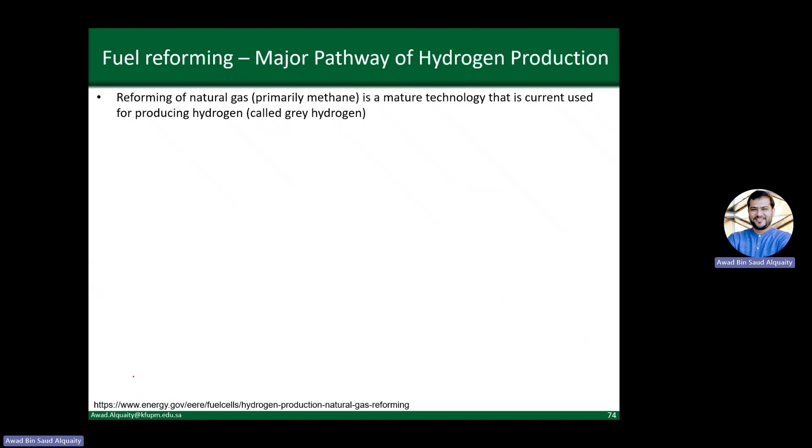Now, when we talk about hydrogen globally, the way the hydrogen is produced is mainly through reforming, right? Reforming of fuel. It can be methane reforming and SMR process, can be oil reforming, which accounts for 29%. Or it could be gasification or water electrolysis. But gasification and water electrolysis put together contribute less than 21% of the global hydrogen production, right? So it's mainly happening through steam methane reforming, 49%, and about 30% happening from oil reforming.

So of course, steam methane reforming is a better way of doing it than oil reforming. It's cheaper as well, so we'll focus mainly on steam methane reforming, and the process remains the same. Then we'll talk about some other options available for producing hydrogen starting from a fossil fuel, right? And lastly, we will also touch upon water electrolysis, a process which can make use of renewable energy to create hydrogen.

Now, steam methane reforming, or reforming of natural gas, which is mainly methane, is a very mature technology. It's used currently in the industry, mainly in refineries, because they need a lot of hydrogen, and it's used for producing what is called gray hydrogen, as per the color palette associated with different hydrogen production processes, depending on their carbon footprint, or depending on the source of hydrogen, basically.

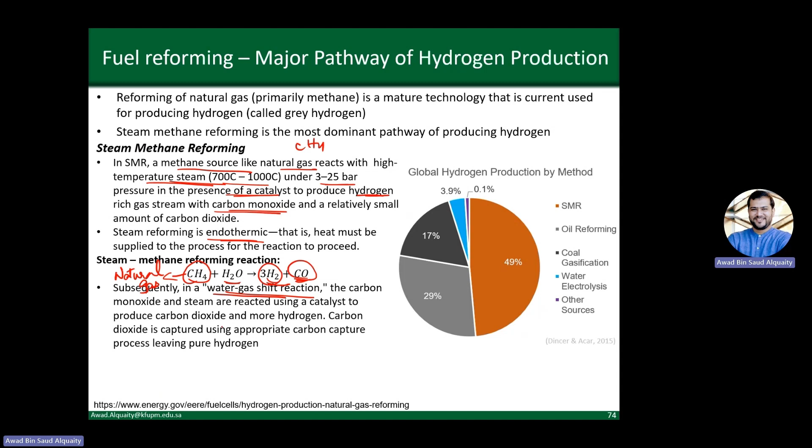In the water gas shift reaction, we produce more hydrogen, and this also happens in presence of a catalyst. So both the steam methane reforming reaction and the water gas shift reaction happen in presence of a catalyst and in presence of steam. First methane reacts with steam, and then the CO that you produce reacts with steam to produce CO2 and some more hydrogen. So in total, for 1 mole of fuel, you get 4 moles of hydrogen.

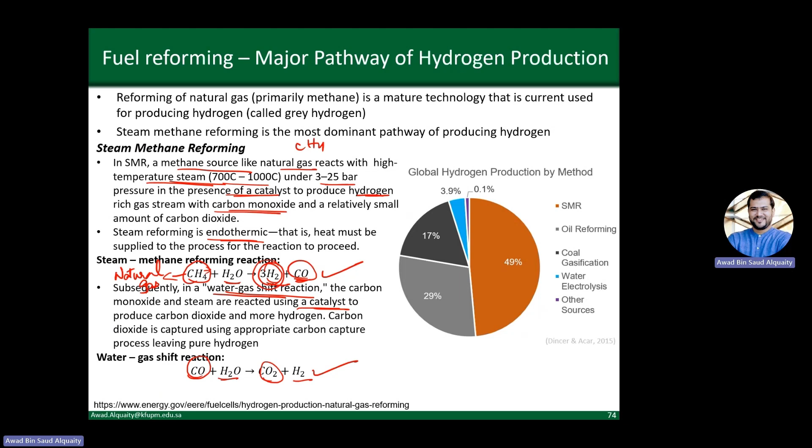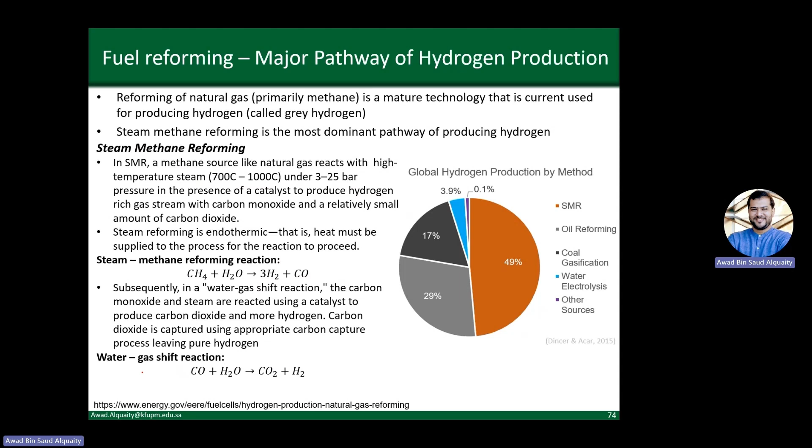3 moles from the methane reforming and 1 mole from the water gas shift reaction. So it's a very good way of producing hydrogen, and as we discussed, it's the most mature. It's a very mature technology. It's the most dominant way.

And although I'm making use of methane here to show how this entire process works, you can do exactly the same thing with other fuels as well. So you can use ethanol, propane, gasoline, and others. But natural gas is mainly used, and natural gas, although we said it's mainly methane, also contains ethane, C2H6, and propane, C3H8, and others. And so the process is very similar to what we have defined here.

Okay, so this is steam methane reforming. Key point is it's endothermic. It requires a catalyst, and it produces some CO2, of course, but this CO2 can be captured. If you capture the CO2 from the steam methane reforming process, then the hydrogen that you obtain is called blue hydrogen. If you do not do carbon capture, then it's called gray hydrogen. Okay.

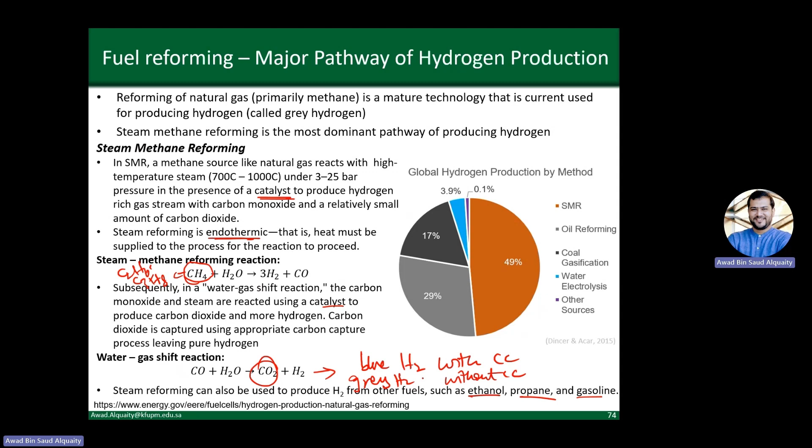Now, moving on, steam methane reforming, although it's a very mature technology and the most dominant way of producing hydrogen, is not the only way. Of course, we want to come up with other ways which reduce the energy requirement and make it cheaper to produce hydrogen. So the two other options being explored on a research basis globally are partial oxidation and autothermal reforming. There are many other options being explored currently, but let's limit to these two.

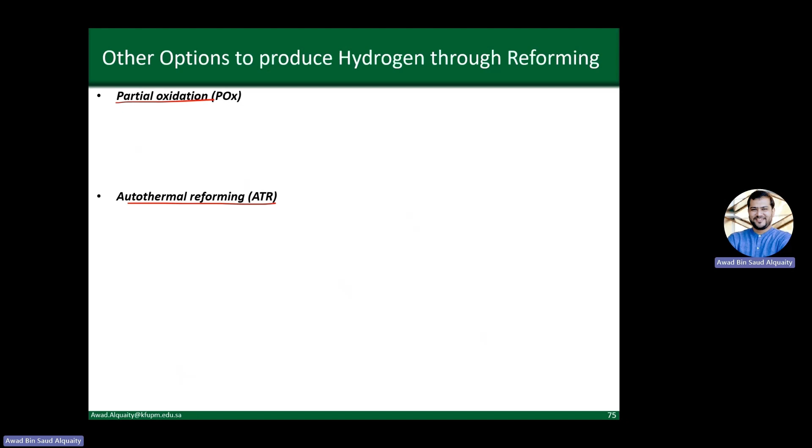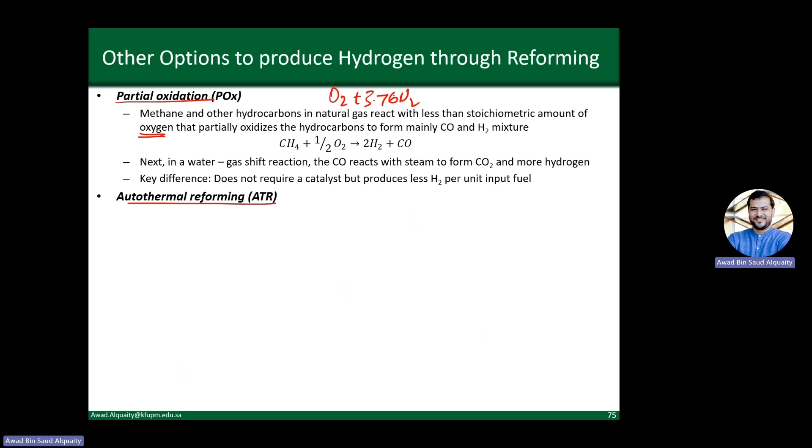When we talk about partial oxidation, instead of reacting with steam, you make the methane or any other hydrocarbons in natural gas react with oxygen. So basically, you're doing a combustion reaction, but incomplete combustion. A key difference is that normally we do combustion in air, a mixture of oxygen plus nitrogen, so for every mole of oxygen you have 3.76 moles of nitrogen. But in partial oxidation, it is just oxygen that the methane reacts with.

So we just supply oxygen to methane, and we supply less oxygen than what's needed. Stoichiometric amount means the amount you need for complete combustion, but we provide less than that, because we don't want complete combustion to happen. We only want this reaction, which is exothermic, it produces heat, to partially oxidize the hydrocarbons, methane for example, and it produces mainly hydrogen and carbon monoxide.

Now, this carbon monoxide, again, you make it undergo the water gas shift reaction, just like we explained in the previous slide. So carbon monoxide plus steam gives us CO2 plus hydrogen, so you get more hydrogen from the next step. Overall, this is another way of producing hydrogen. It produces less hydrogen per unit of fuel, because here we get a total of 3 moles of hydrogen for 1 mole of methane, compared to 4 moles of hydrogen for steam methane reforming.

But this does not require a catalyst, and you don't even have to supply heat. It's not an endothermic reaction. So it's an interesting reaction. The economics still do not favor it, which is why steam methane reforming is the most dominant. So there are some issues that need to be resolved to make it more economic. But this is another promising way of producing hydrogen.

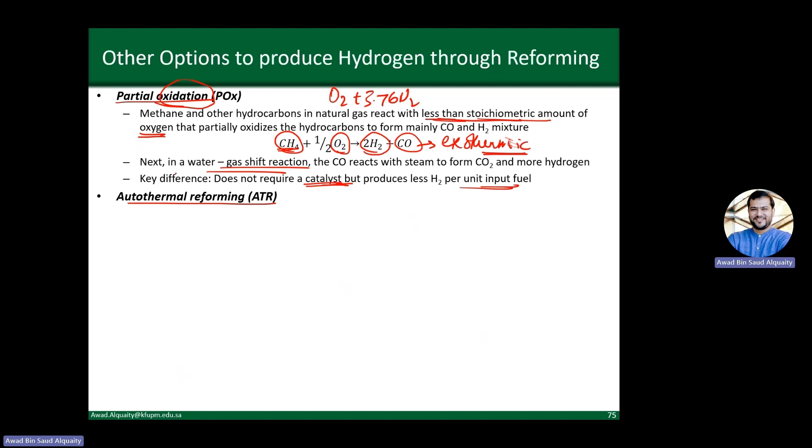Now, the last promising way that we want to discuss here is autothermal reforming. Autothermal reforming is a combination of the previous two methods, steam methane reforming and partial oxidation. In autothermal reforming, some part of the methane reacts with oxygen in the partial oxidation process, which is exothermic, and produces hydrogen and CO, and the remaining part of methane reacts with steam, which is an endothermic process.

So what you have here is one reaction of methane producing heat, another reaction of methane consuming heat. So what we have is a reaction which is thermally neutral, right, or a reaction where you don't need any external source, nor do you have to reject heat. So this is almost like a constant temperature process, and it produces slightly less hydrogen as compared to steam methane reforming, but it produces more hydrogen as compared to partial oxidation.

It's sort of a hybrid process, right, a hybrid of partial oxidation and steam methane reforming. The advantage being that you don't need an external source, and you're increasing the amount of hydrogen produced as compared to partial oxidation. Okay, so in terms of the hydrogen production, right? Steam methane reforming produces the most amount of hydrogen per unit of fuel. Next is autothermal reforming, and last is partial oxidation.

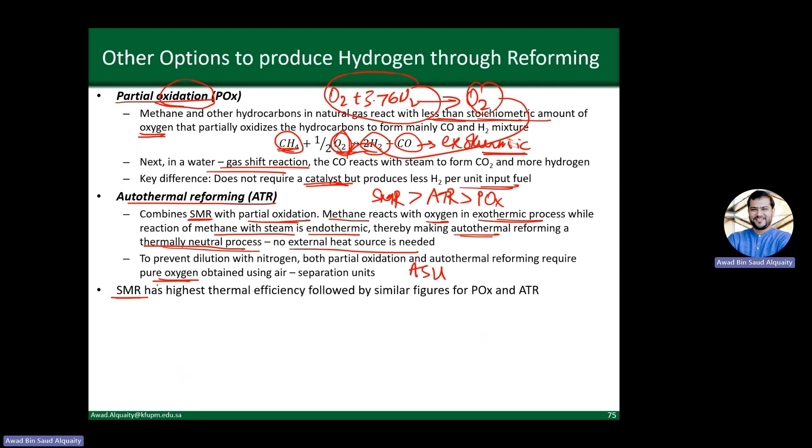Okay. Now, lastly, if you want to produce hydrogen not from a fossil fuel but from renewable energy completely, then we can make use of water electrolysis to make it happen. Now, water electrolysis simply is an electrolyzer which takes an incoming water stream and splits that into hydrogen and oxygen. You can then still sell this oxygen as well, right? On top of the hydrogen that you get from here.

Now, the electrolysis process, of course, makes use of a lot of electrical energy, and in principle it's just a reverse process of what happens in a fuel cell, right? In a fuel cell, you provide hydrogen, it takes the oxygen from the air, and then it produces electricity. Here, it's the opposite. A fuel cell produces electricity and also some amount of water, right? So here is the opposite. The input is water, and the output is hydrogen. Okay, it's an interesting process.